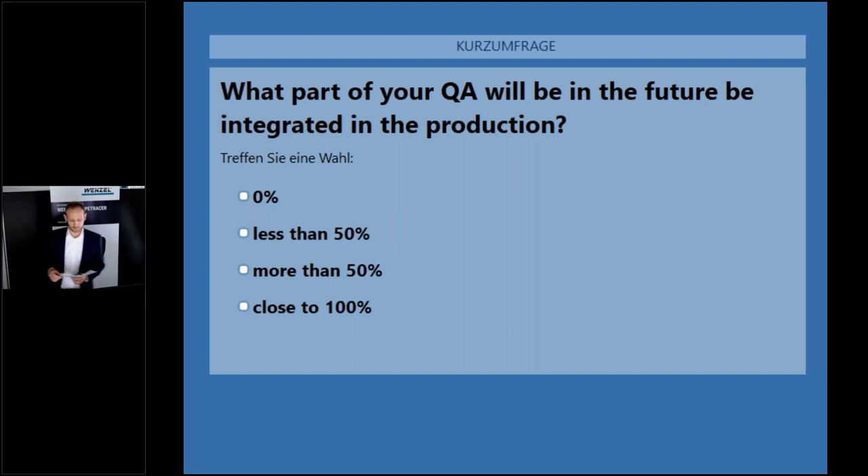The outline of my talk is very simple. First, we will quickly present the company of WENZEL, just one slide to give a brief heads up for those who don't know us. Then we will move right away into the questions we have in the shop floor environment. Okay, let's start. Thank you very much.

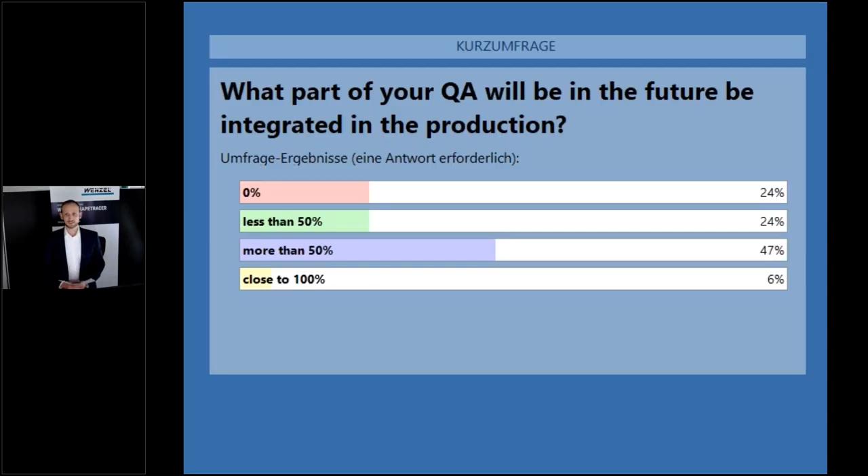Let's start with WENZEL. We've been around now for 50 years. We have a turnover of approximately 90 million euros. We have 650 employees worldwide in 17 locations, so basically everywhere in the world you can have a WENZEL guy right away for you, and a lot of sales and service partners, over 50, in 5 product lines: CT, shop floor, LH machines, and so on, with over 10,000 sold machines in the market.

Let's see about that. But first, before we start with the machine itself, I think I quickly want to raise the question of what is changing if you come from the quality rooms, measurement rooms with a very specific environment, into the production area. I think there are 3 key things that change now: first, people; second, space; and third, reliability. What do I mean by that?

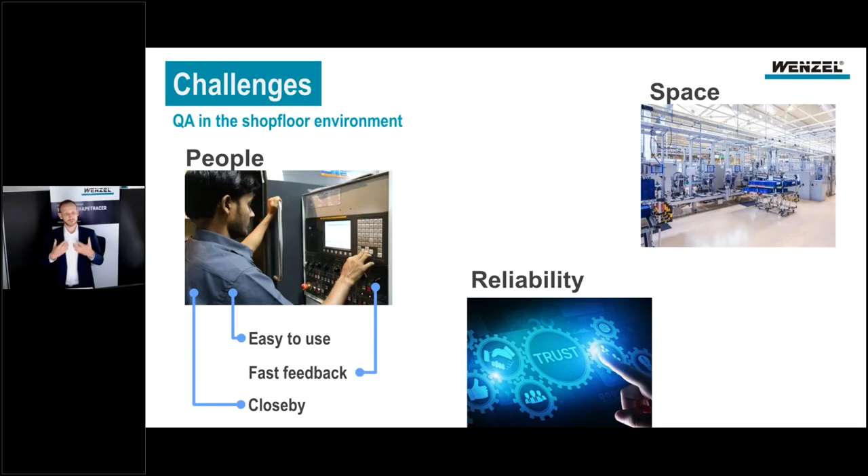It's close by, and close by means material flow. You don't have to put the material somewhere else and then get it back; you can take it out of the machine, put it on the measurement machine, and then right away get it into assembly or whatever. But on the other hand, this means small footprint. Production space is always expensive, so we need quality assurance machines or CMMs that have a small footprint in order to get them right next to the production line.

And we have to be really fast. The scale we're talking about now is we have to have the same number of parts per hour as the production machine, and that's particularly challenging. This is something I want to address here too.

And of course, reliability. You have uptime and so on. The machine has to be much tougher. We're not in such a controlled environment as in the measurement room, but in a production environment. So this has changed. There's more temperature, perhaps oil, or something. It's your production, you know it. So our machines have to get tougher.

One thing that's also very important is future ready, because you don't want to change it all the time. You want to buy a machine and then maybe in 5 years buy a new sensor. This means our machine has to be designed so that you're ready for the future. And reliability also means the service has to be really responsive. If you have a problem, the guy has to come right away and know how to fix it quickly, so the production line doesn't stop. So that's the challenges, in my opinion: people, space, and reliability.

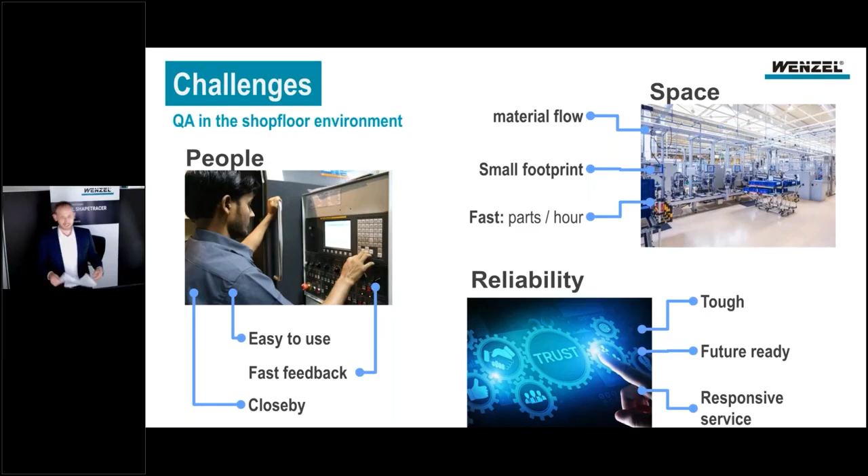Here I have a second question for you: to what extent are you planning to integrate quality assurance into your shop floor? From my experience, there are 4 options. You can have it still in the measurement room, or go to the next step where the measurement room is much closer to the production line, or have worker self-check, meaning the worker takes the part out of the machine and measures it, or even full automation with a robot, so you don't have any workers in the production line at all. So quickly answer me: to what extent are you planning to integrate quality assurance into your shop floor environment?

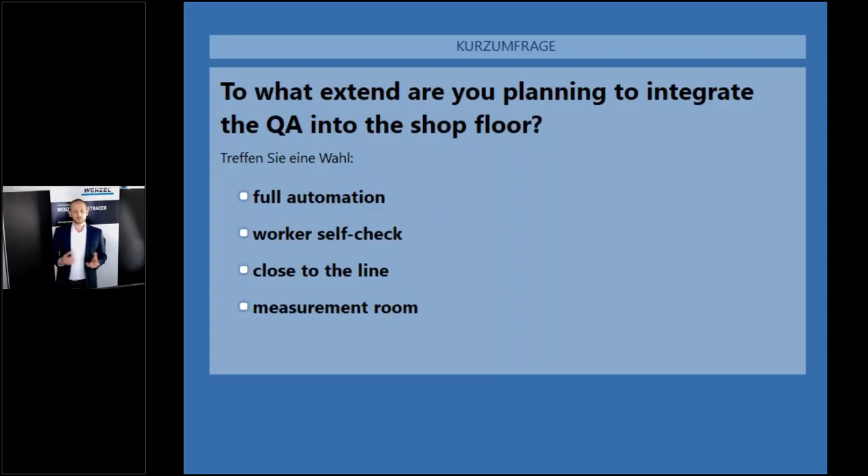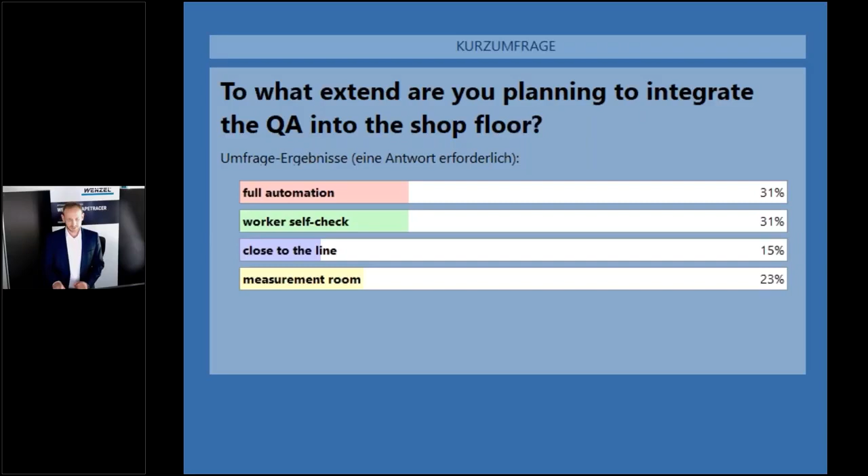To what extent? Okay, here we are again. Thank you very much for giving the answers. And now it's time to present the machines. It's not only one machine, of course. You have a lot of tasks, and what Wenzel can offer you is a portfolio. We have exactly the machine for your tasks, specifically tailored. And that's the good thing.

If you look at that portfolio, we have the SF55 with a 500 by 500 by 500 measurement volume, the SF87 at 800 by 700, the core which is much more specialized with a rotary table, our new machine, as well as the R machines for really big parts—I think the biggest one we built is something like 60 meters long. But today I want to concentrate on the SF series: the SF55, 87, and the new 1210.

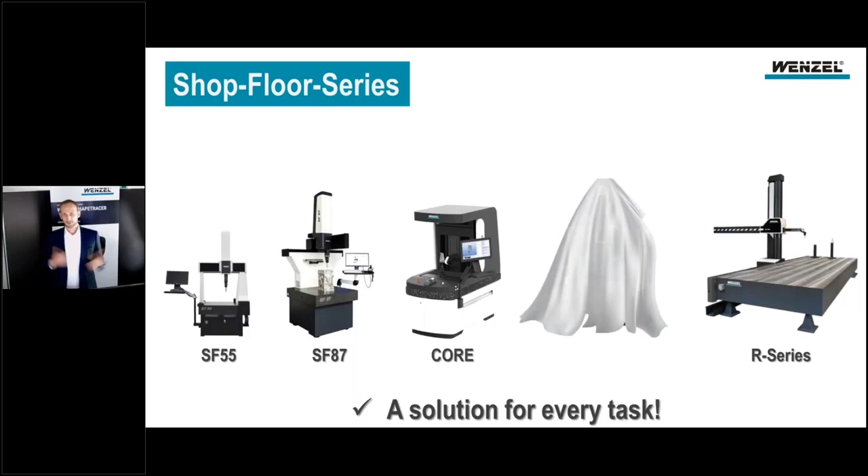So let's start with that. SF55, it's a very small, compact machine, meaning if you want a very small footprint, you should pick that one. If the part fits this machine, then you're fine. And it's really fast. Of course, the problem with these webinars is I'm just standing here in front of this background. I can't show you the machine, which is typically what I would do at a fair.

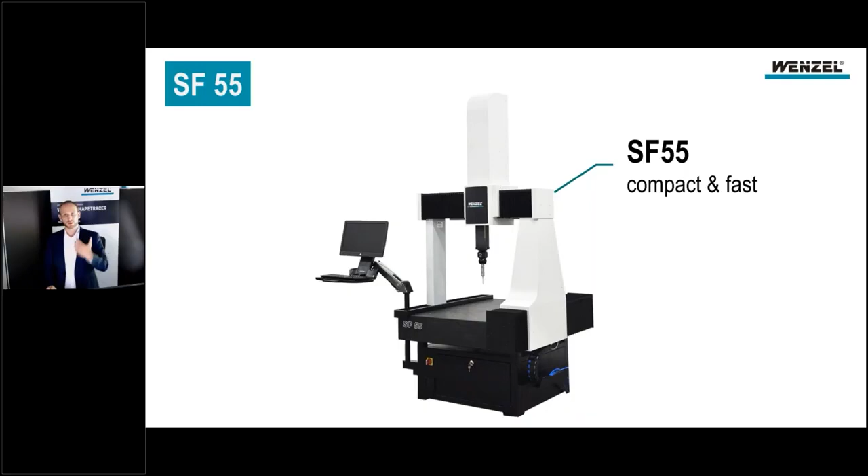This is why we made videos for all the machines. This is what I want to present to you now, the video of the SF55, so that you can actually see how it moves, how it works, and then we'll talk about it. Okay, so here's the video.

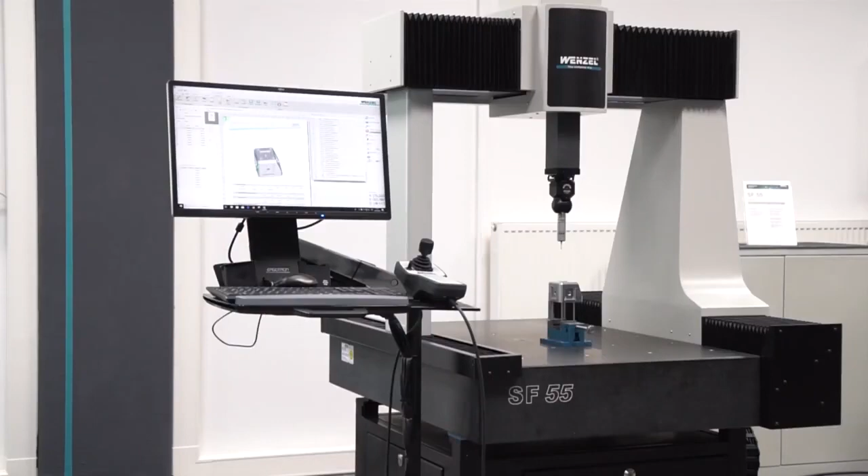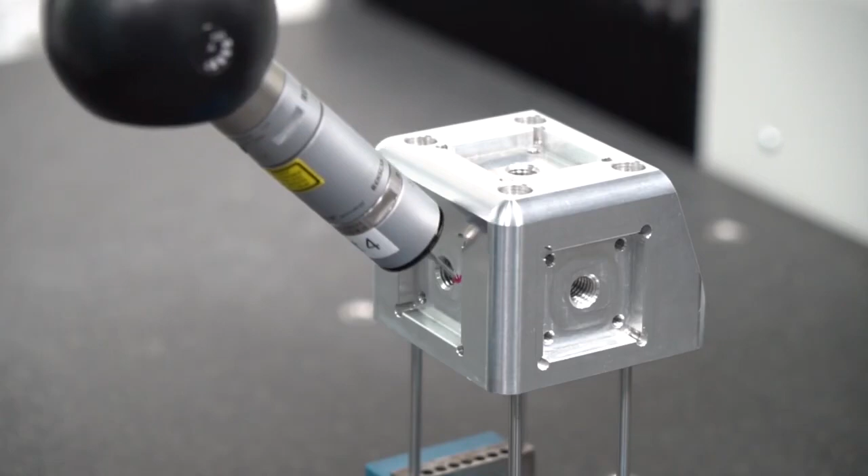Starting up. The Wenzel shop floor series can be used in the production environment as well as in classical quality assurance to measure parts both individually and in series. The intelligent and compact design is suitable for a wide range of shop floor applications, especially in the cutting and forming industry. The corrosion-free guides of the machine are made of granite, and hand-lapped with high precision. The shop floor CMM has passive vibration damping and can optionally be equipped with active vibration isolation. The high accuracy of the SF55 is temperature stable over a wide range.

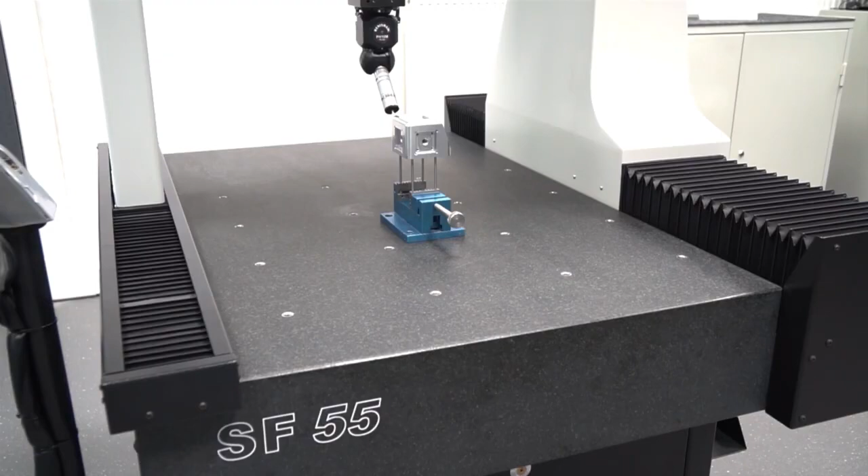All horizontal axes are covered. The footprint is only 1.6 square meters. It has a height-adjustable user panel for ergonomic use, and with the quick selection board in the software, it is very easy to operate by production workers.

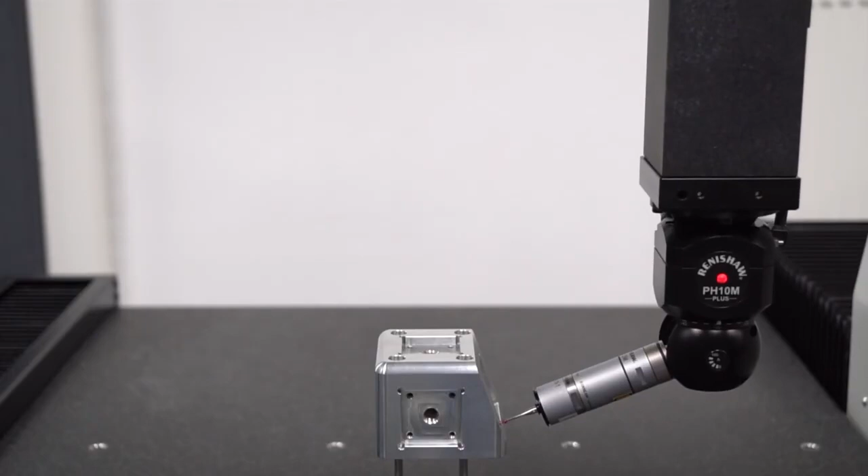With these features, the WENZEL SF55 is perfectly prepared for shop floor area conditions. The WENZEL SF55 can be equipped with both tactile and optical sensors. For use in serial measurements, the machine can run in superfast mode. After measuring one part in standard speed, the following parts can be measured in superfast mode with nearly the same repeatability and be compared with the results of the first measurement.

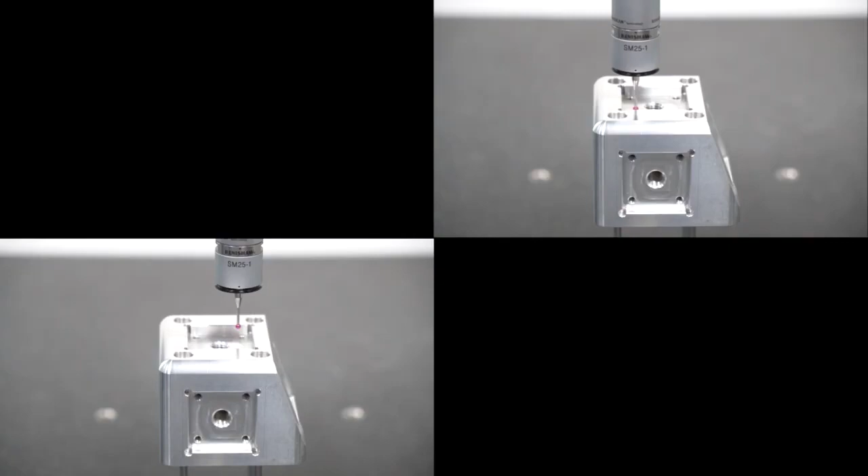WENZEL Shop Floor Solutions. Robust, fast, ready for automation.

So yeah, let's start the presentation again. That was our SF55. As you can see, it's a really compact machine. We're talking about 1.6 square meters, that's not a lot. You saw it in the video, the size is really small. So if you have a space problem and the part fits this machine, then this is your machine. Just take it, put it right next to the fabrication machine, and you're fine.

I really have to point out, it's extremely reliable, these kinds of machines. We have it for some big customers. I think one has something like 20 machines there in a really rough environment, and it's been working for like 10 years or something, with nothing really happening with the machine. So it's a very reliable, stable machine which we've been working with for years, and you can be absolutely certain that it's working.

And it's temperature stable, and as you can see, you have a lot of options. You can put tactile probes with it, like the TP20, TP200, and so on. Or if you want to be a bit faster and you're not really into the precision, then we're talking perhaps about the PH20 - you can be really fast with that. The advantage here is that the head movement replaces the machine movement. Or if you want to go really accurate, you can use the SP25.

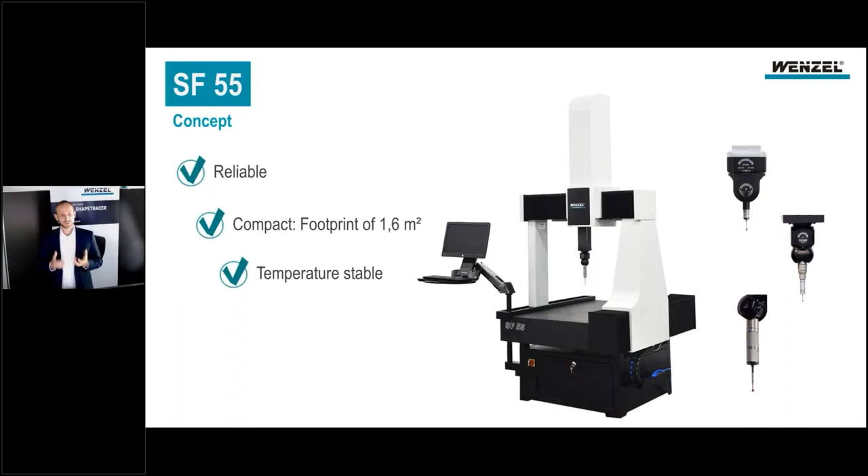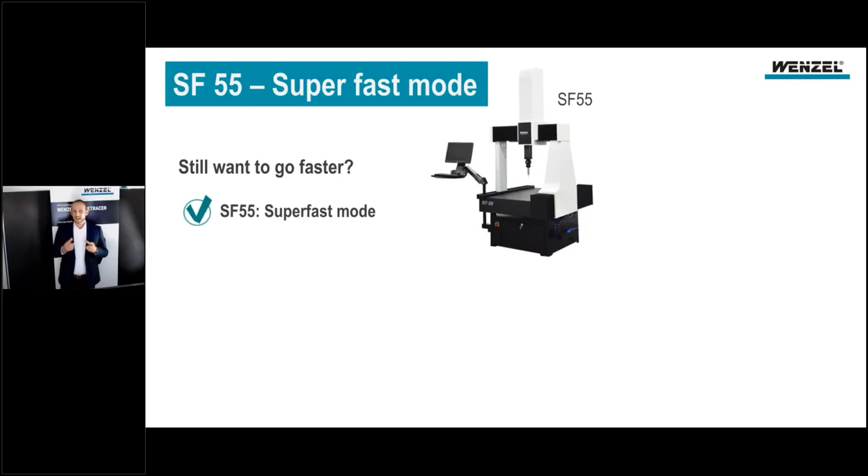There was one idea from that video I want to present in more detail - you still want to go faster? It's a fast machine, but you can still want to go faster. There was this idea of the super fast mode, which we put into the machine. It's basically the idea that you take 10 parts that come out of your machine, and measure one of those pieces very accurately, just the way you've done it all the time. And for the other 9 parts, you put the machine into the super fast mode.

The key thing here is it's still reproducible, so you get always the same results if you measure 10 times again. That means you compare these reproducible results with the accurate result you had first. And then you always take like 1 out of 10 or 1 out of 100, to what extent you want that part measured really deeply and accurate, and for the other ones, you can be fast.

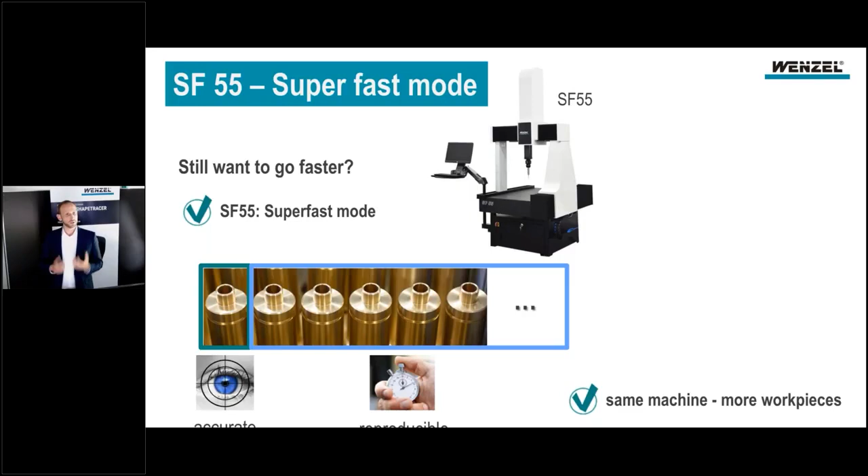That means you have the same machine, the same shop floor space we're talking about, but you get much more work pieces through this one particular machine. So I think the super fast mode is really something you should consider in your process if you buy such a kind of machine and you're in a hurry.

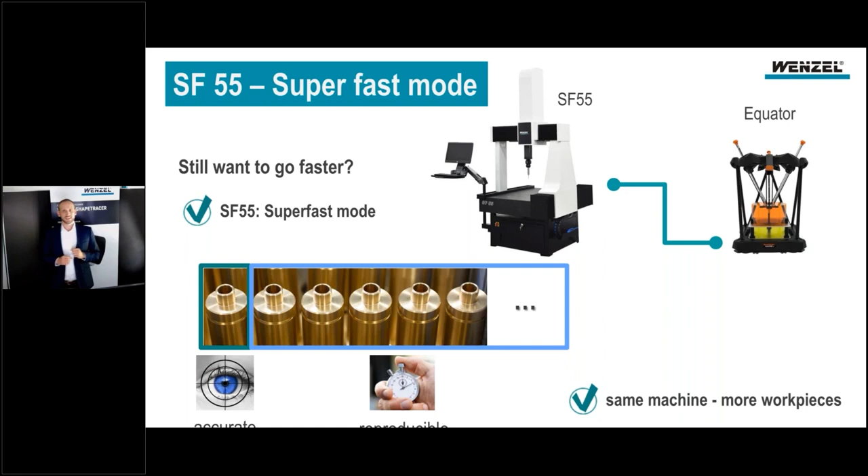And just to put one more idea into your head, this can also be done with the Equator. The Equator is also a very reproducible machine, and then you sometimes have to double check it with an accurate machine, SF55, or you have just one solution with the SF55. So if you're in a hurry and you really have to get in line here, then this might be your option.

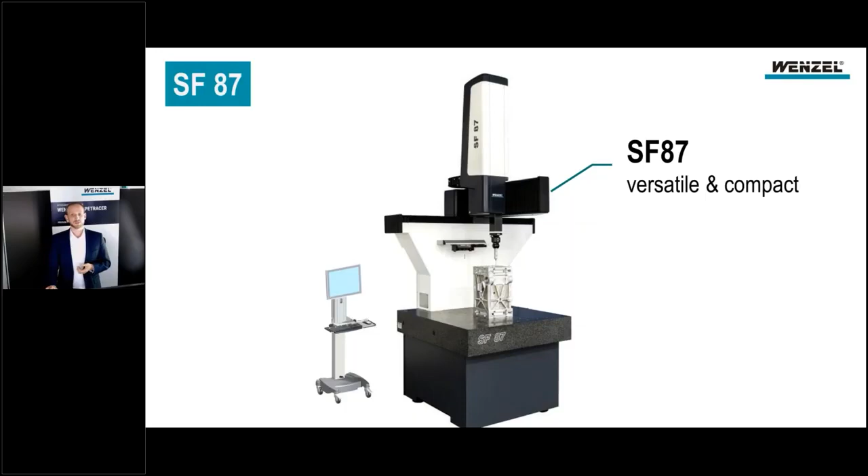Okay, let's move on to the next machine. It's the SF87 - we're getting bigger now. As you can see, we started with the smallest machine, and as we're getting bigger, the machines also become much more versatile. Here we are at the point where you have a machine which is much more versatile than the SF55, but on the other hand, it's still compact. And of course, we also prepared a video for you so you can see it in action. So here it comes.

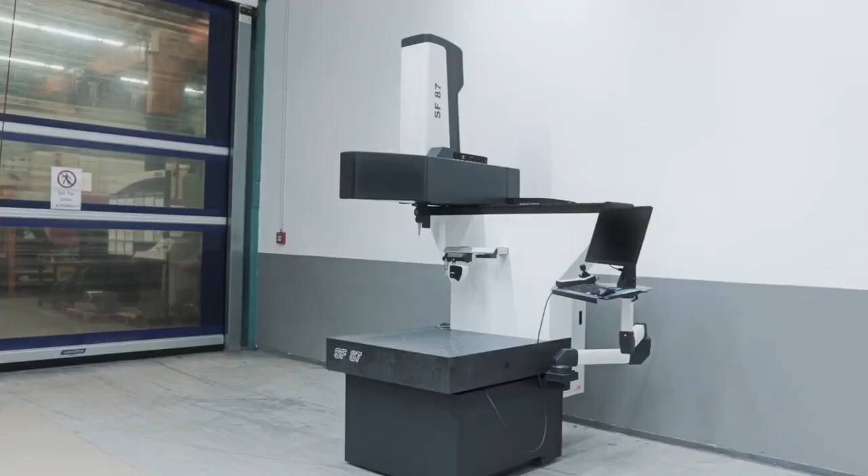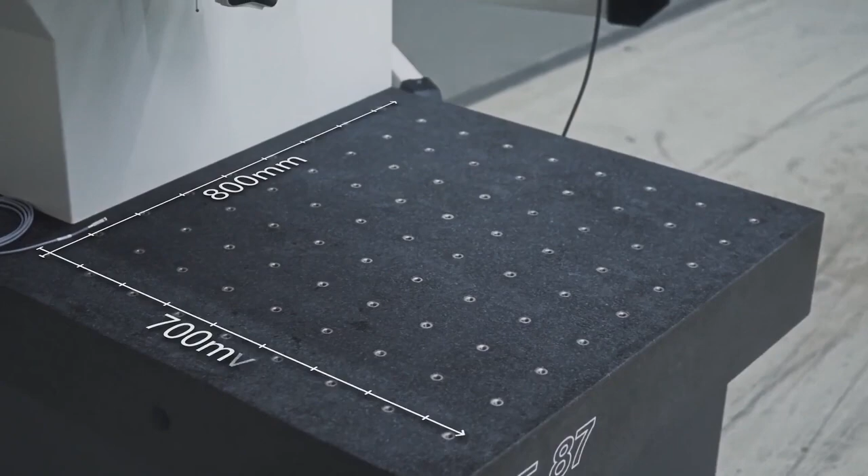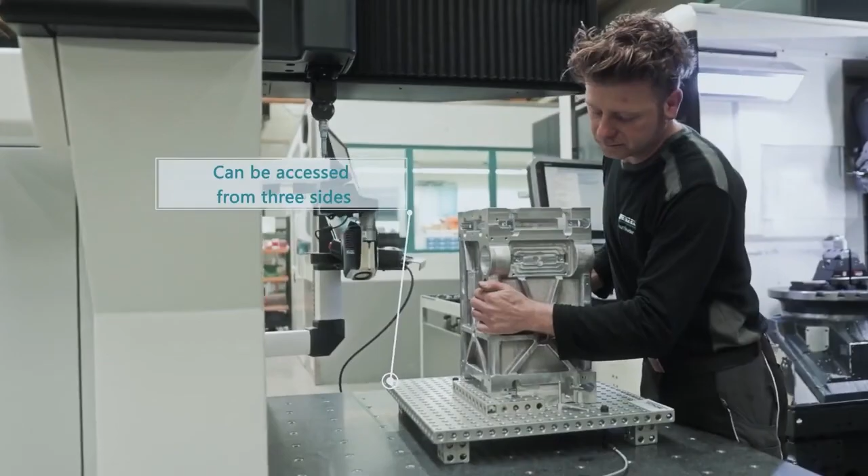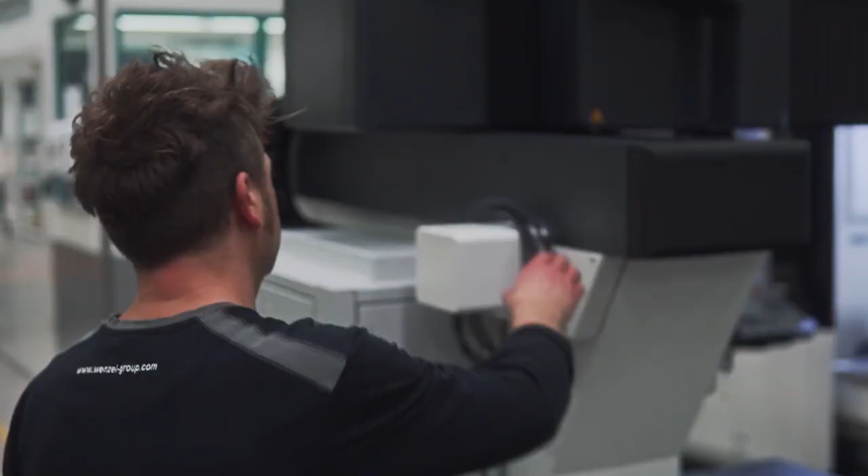This is the new WENZEL Shopfloor SF87. The coordinate measuring machine was developed for the production environment for measurement of small to medium-sized workpieces. A strategic choice of materials was made during product development. The accessibility to the measuring area from 3 sides is optimal for automated access by robots and can be adapted flexibly for more complex tasks with customer-specific requirements. The SF87 is easy to transport and only a standard electrical socket and no compressed air is required to connect the machine. It is therefore always available for flexible use in the production environment.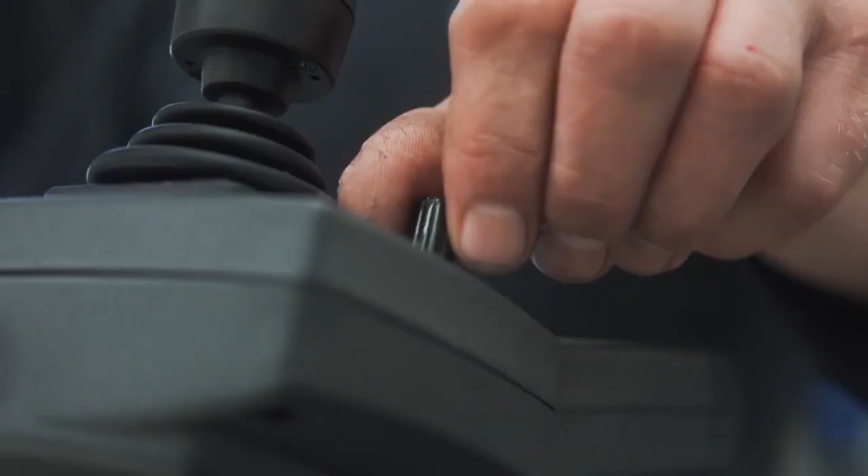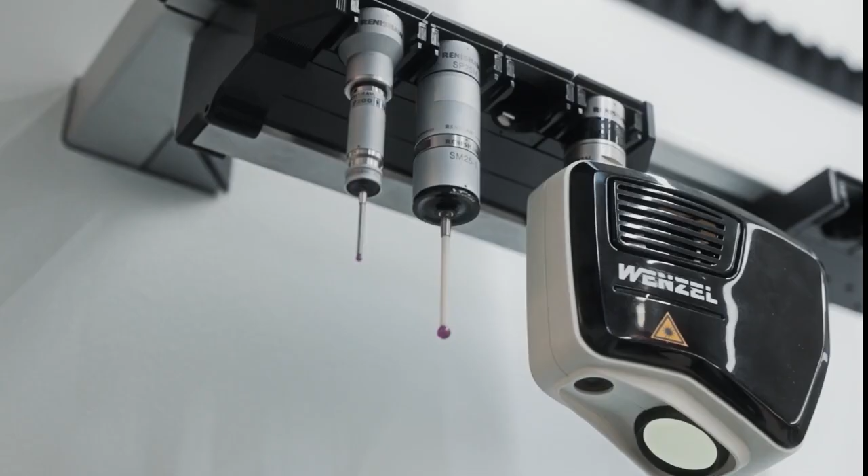The intelligent machine concept has been designed for optimum ergonomics and user-friendliness. With the modular combination options of powerful probe heads and optical sensors, the machine can be adapted to its respective tasks, which leads to considerable increases in efficiency in the measuring and testing area.

So that was our SF87. And what's unique about this kind of machine is look at the access and the volume of this machine.

It's an intermediate size, and you have the cantilever design, which basically means you can access it very easily from 3 sides. You can put a robot there, or even if you're just a person, and we put it at the right tabletop height and so on. So it's very good to access and to work with.

We still have an extremely small footprint of just 2.3 square meters. All mechanical guideways, really tough. It's all made from steel so that you have one material all the way up, and it's ready for automation. And if you look at it, you can see that the controller is also integrated into the machine.

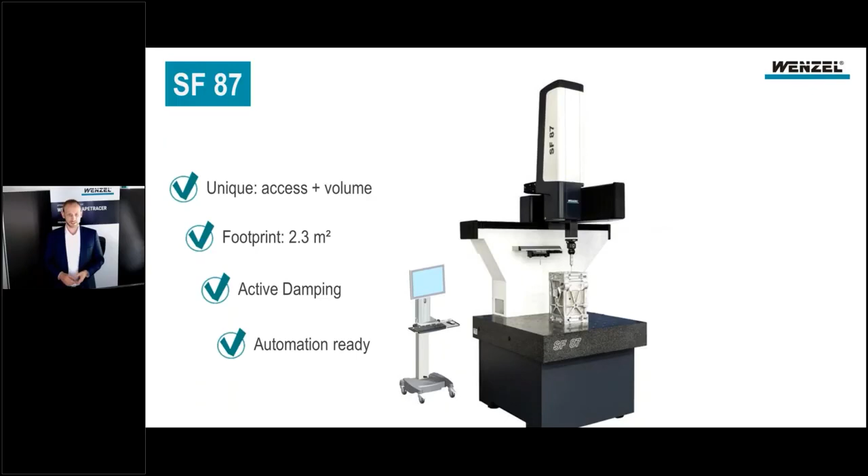You actually can't see it right now because it's behind the machine in a backpack. So all these things together make it, in my opinion, a very unique machine where you have this combination of tough, big volume - it's 3 times the volume of the SF55 - compared with a small footprint. And that's the bonus, it's much more versatile.

You can still put the TP20, TP200 or the PH20 on the machine, but now as the volume grows bigger, you can also put optical probes on the machine, and you have always the standoff distance, so you have to move around the part a bit more. And here you can already use that very well on the machine.

And if you want to go really fast, then you put the Revo there. This combination of the bigger measurement volume and the Revo can offer you a very flexible machine, which is extremely fast for the application if you want that. So it's much more flexible and still compact.

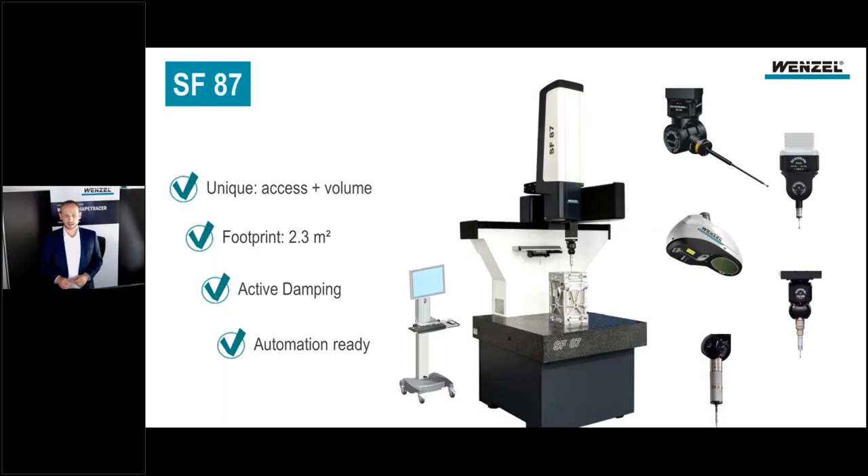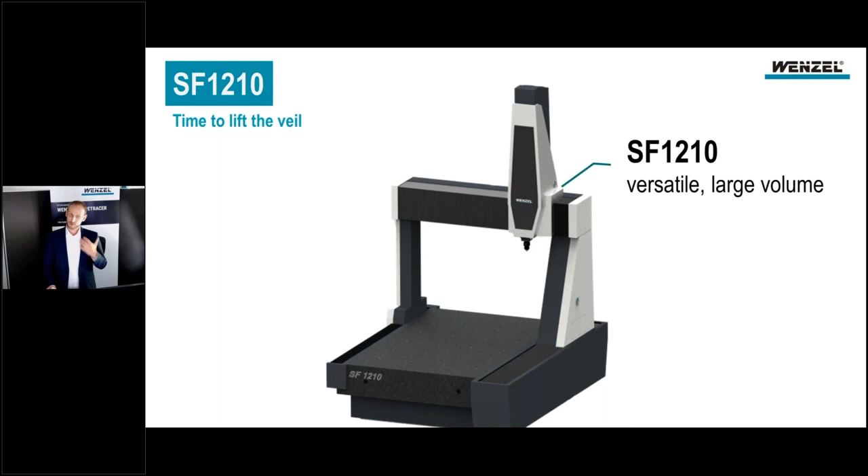And now let's go to the new one. So we proudly present the SF1210. Here we have a machine which is even more versatile, and we get to a volume that is way bigger than that of the SF87 or 55. And of course, we want to show you how it's looking and how it's moving.

And here comes the video.

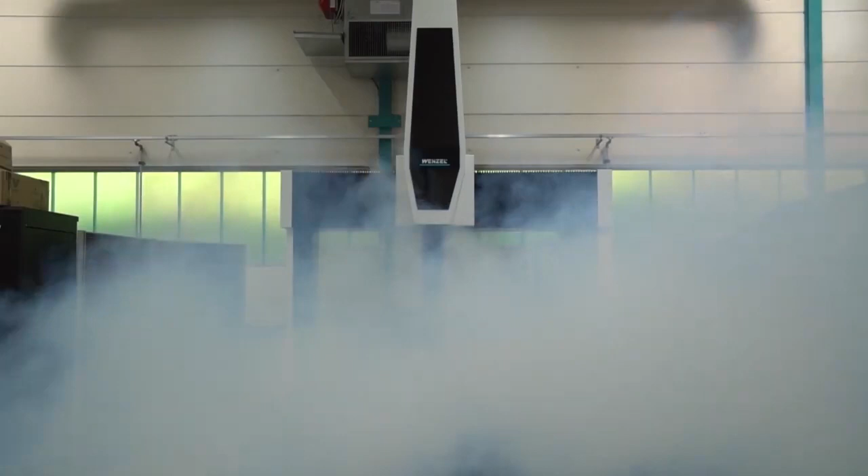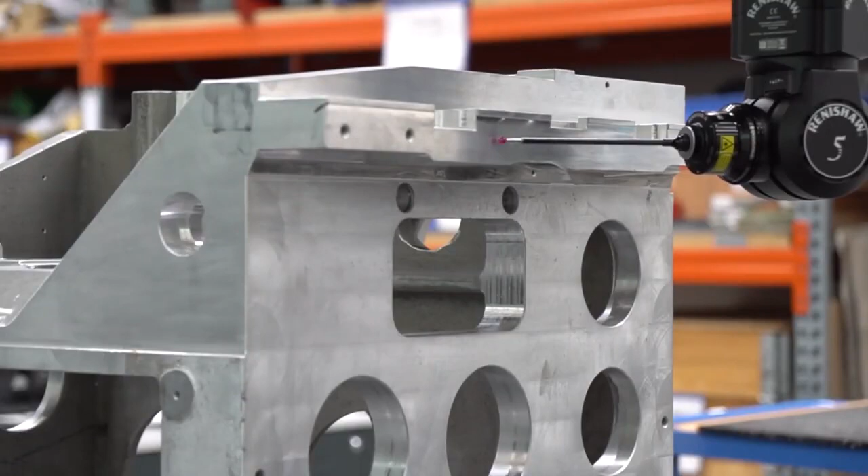The WENZEL Shop Floor series can be used in the production environment as well as for classical quality assurance to measure parts of various sizes both individually and in series. The new SF1210 is WENZEL's answer to the trend of bringing metrology closer to production lines. A measuring volume of 1200 by 1500 by 1000 millimeters is unique on the market for this machine type and enables the measurement of even large parts and assemblies. The Y-axis can be individually adapted. Covered guiding systems the same height as the base plate enable machine loading from 4 sides, by hand as well as by a robot or an automated loading system. The SF1210 is multi-sensor compatible with a wide range of probing equipment. This flexibility increases efficiency in measuring and testing processes. The SF1210 with extended temperature range, small footprint, and double drive in the Y-axis is highly suitable in the manufacturing of castings, chassis parts, subframes, engines, and a lot more. WENZEL Shop Floor Solutions. Robust, fast, ready for automation.

So that was the video of our SF1210. As you saw it moving, you can put really big parts on this kind of machine. And so you can also load it from all sides. So let's look at the advantages.

First of all, what we really took care of, because sometimes it's the small details that make life much simpler, is that you have excellent four-sided access. If you look at the bellows on the right and left guide of this machine, you can see that it's on one level with the base plate. That means loading of this machine is extremely simple, and you don't have to build your fabrication around this machine, but you can just put it any way you like into your shop floor, and it's always simple to load this kind of machine.

So one of the simple and clever things we put into this machine. On the other hand, it's robust. We're talking about an all mechanical guideway here, which is the difference also to the LH series. We have mechanical guideways here in all axes, as you saw. And we made rod drives into the machines.

These are very well-known drive systems which are extremely reliable. They hardly ever break. And this together with a dual drive system in the Y-axis makes this machine extremely robust for the shop floor application. Then you have the large volume, of course.

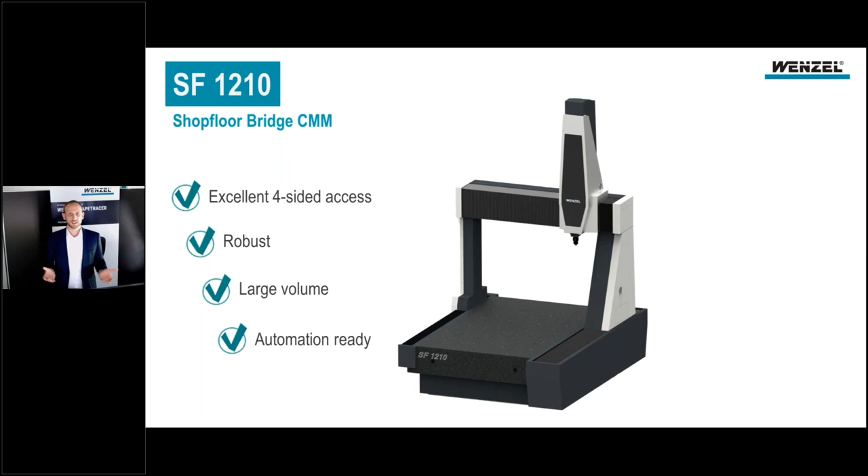So if we look at what kind of probes can work on this machine, basically everything. You can even take the larger optical probes on this machine. And as you saw with the Revo, it can be really fast. There was this helical scan where the machine just drew away and you had this very quick, rapid head movement. This is something that would take much longer if you took the SP25 or even the TP200. So you really should look into, if you want speed, the Revo option here.

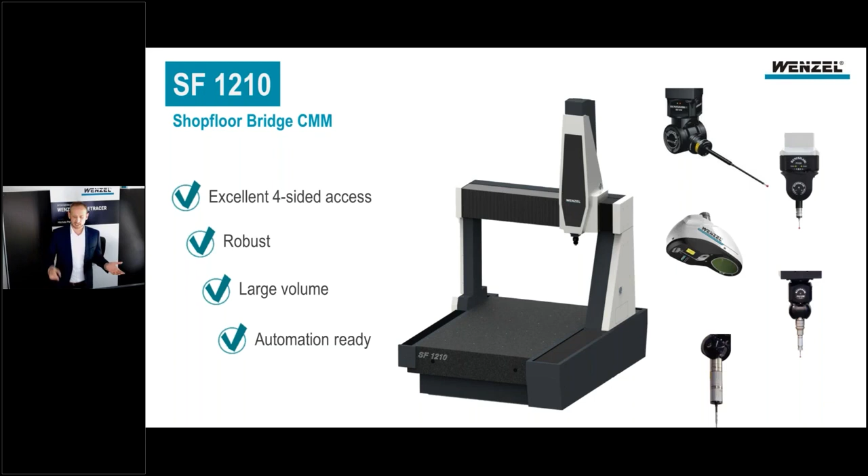So these are the three machines I wanted to present to you, and now we're coming to the solution finder. So what's the right one for you? Well, this is basically a two-step process, and it's very simple.

The first one is size. So of course, your part size is most important. The part has to fit on the machine. But there's one thought I would like to place into your head here: why not put multiple parts on the machine?

We had several customers who actually put one part on the left side of the machine, and while the machine was measuring this part, they had time to load the other side. So they had zero stopping time of the machine, zero loading time. You can very efficiently use this machine.

So if that's possible for you, you can even put a pallet with 20 parts on the machine, and then you have left-sided and right-sided loading. So you should always consider, perhaps it might be a good idea to measure several parts on the machine and take it one size bigger.

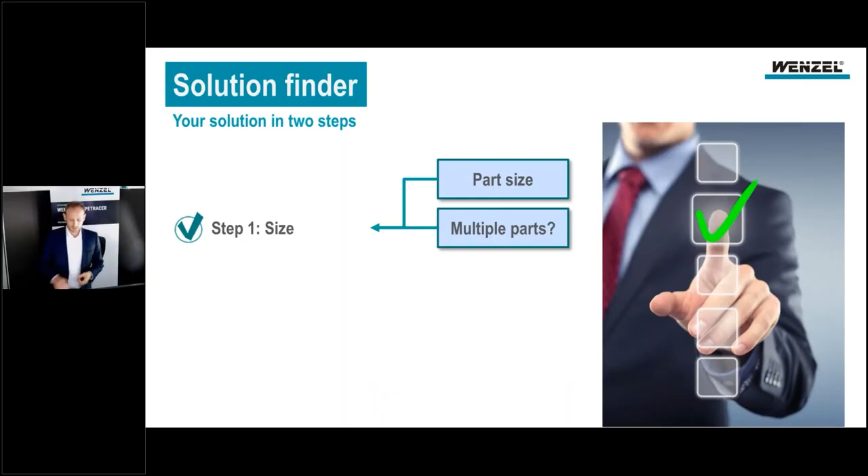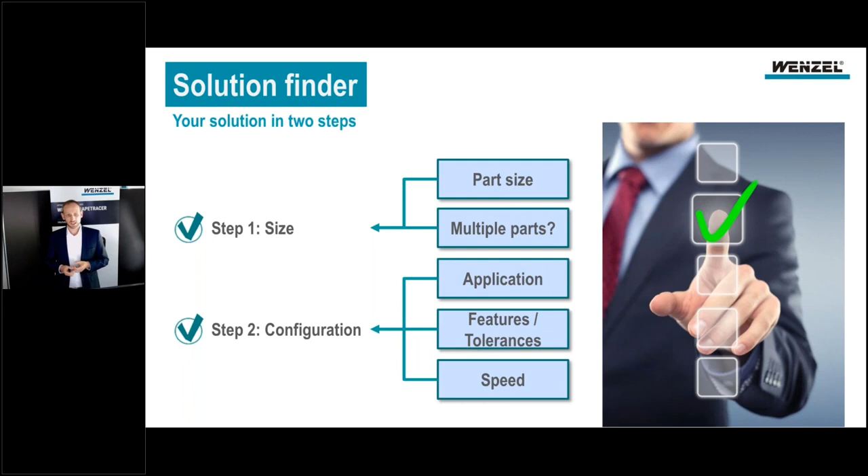And the second step is the configuration. What's the most important thing here? Of course we had part, now we have application. What's your features? Which ones are your tolerances? What about the speed? This has a very big impact on the configuration you want to put into your machine. Okay, so these two steps, two slides for those two steps.

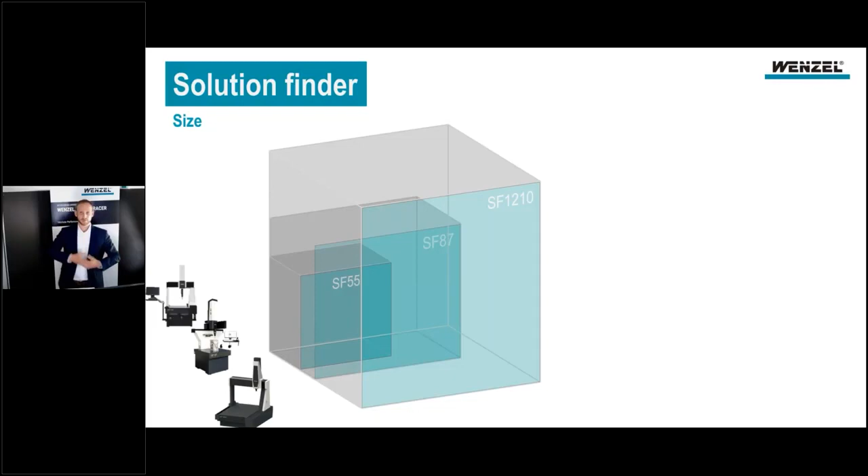One slide in the solution finder is the size, and I gave you the numbers. The SF55 is 500 by 500 by 500 millimeters. And if you go to the 87, you can see in these cubes very clearly it's 3 times the volume. 800 by 700 by 700. And if you go to the 1210, 1200 by 1000 by 1500, then you have, I calculated this morning, 4.6 times the volume. So it's always an increase of 3 and then almost 5. That's quite a lot.

But what's more important for you is, for your footprint, you need the optimal size. And this is what we want to offer you. We have 3 machines, so if you look at the footprint and at your workpiece, if you have a larger workpiece, you take a bigger machine, but it doesn't have to be really too big because we have it in every step for you.

Or you put more parts on a larger machine, or you take the very small compact machine. If you have a small compact part and you want to measure that and you don't have much space, then you take the small machine. That's absolutely clear. For us, what's important is we have the optimal size for you. And all the machines are very versatile with the probes you can equip to those machines.

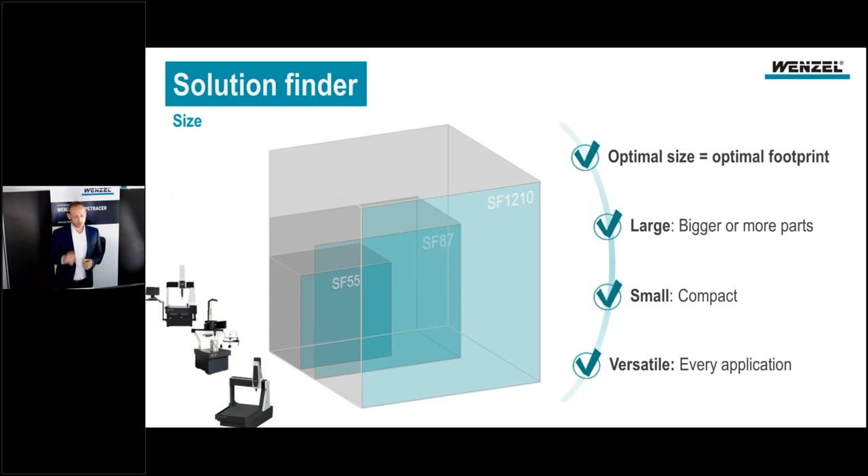And this is, I think, something we should also look into in step 2. So as solution finder, of course, what's always important is, if we look at the parts we're having here, accuracy and speed.

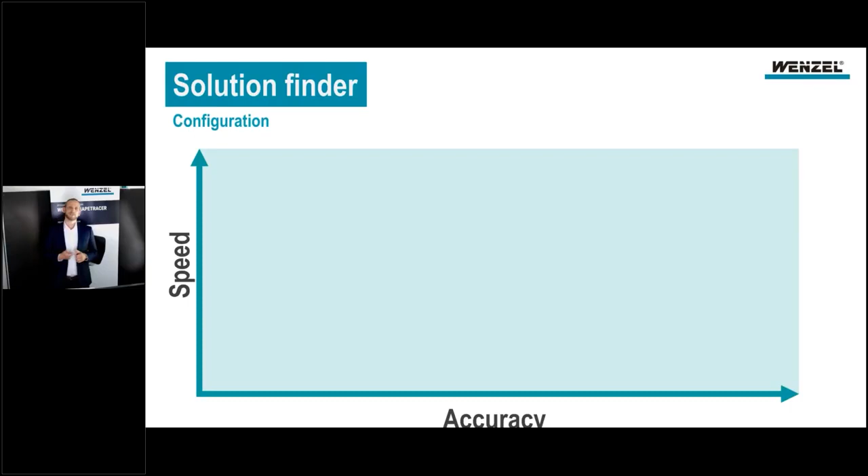And if we put now all those probes we had into this diagram, the speediest one is the optics. If you have a mold or something where you have to measure a whole area, then optics is your choice. It's really fast, and you have a point density that's almost unreachable by any tactile means of measurement. So that might be your friend.

Or if you say, okay, I still want to be speedy, accuracy is not my thing, it's fully sufficient, then I take the PH20. Here you have the head movement and so on.

Or if you want to go, you say, okay, speed is not my problem, but I want to be more accurate, then look at the touch trigger probes, TP200, TP20, or the scanning probes, SP25, which are way more accurate. And if you say, hey, I want to have it all, fast and accurate, then you look at the Revo.

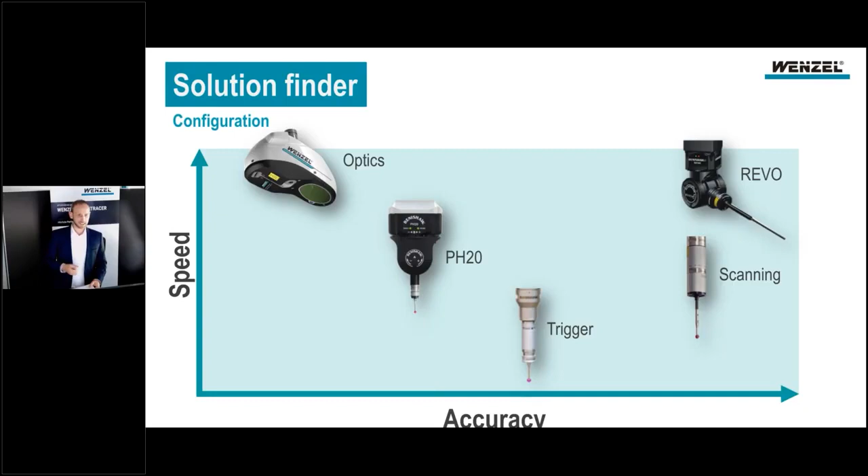As you can see, for every size of workpiece and every application, we have the machine, and it's so flexible that you can put exactly the kind of head that fits your application onto this machine. So solution finding is actually quite simple.

With that thought, let's look at something different. Because we don't only sell our machines, but we also have to produce them, and so we have experience, and there I have a question for you. In our opinion, it's also important to have plannable costs sometimes. So here's my question: how important are plannable service costs for you? Is that very important? Is that relevant?

If you buy a machine, how important are plannable service costs for you? Very important, is it relevant, or do you say, okay, Wenzel, they've been around for 50 years, they know what they're doing, so I guess that's okay. So how important are plannable service costs for you?

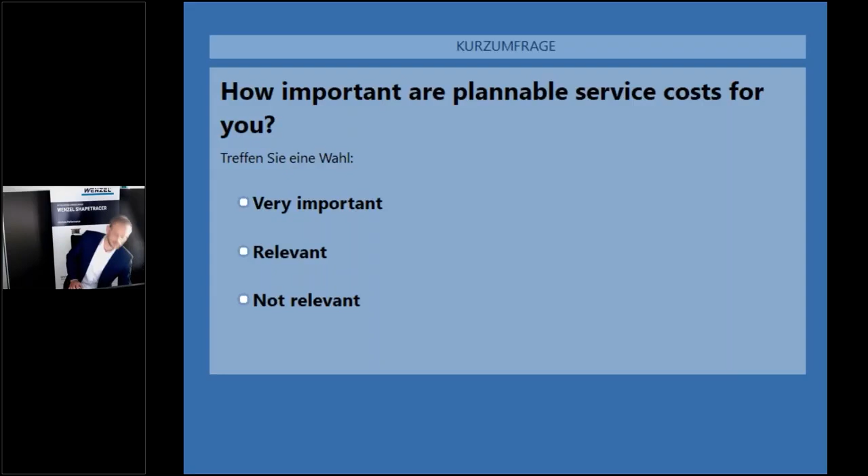Because as I was saying, we're also producing our measurement machines, and this is why we also have some experience as to how producers are thinking. When I talked to our production guy, he told me, oh yeah, we have these contracts and so on, and we know exactly what our machines are costing. And if we are moving our machines now from the quality assurance measurement rooms into the production, this might be interesting for you. That's why we placed the question here: for your buy decision, how important are plannable costs?

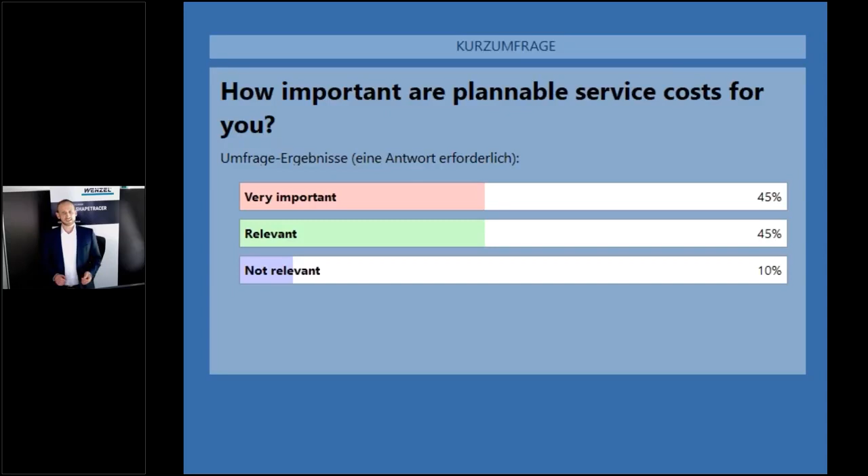Okay, I see. Thank you for voting here. And for all those who said, oh, that's very important for me, I think I have a solution for you, and that's the powerful service of Wenzel.

So what's the idea behind that? It's exactly that: you want to have plannable costs, you want to have uptime of 95% or even beyond that. And for that you need a very, very reliable service, and you have to know what kind of costs to expect when you buy this kind of machine. This is why our service guys came up with this powerful service plan. Here you have guarantees, you have a fast and guaranteed response.

And I like this very much, because for me it's not only a machine you buy, but you're buying a whole package, right? You're buying the machine, you're buying the service if you buy from Wenzel, and you're also buying the software for that. And if we look at all this combined, I think this is one of the pieces that have to fit into this jigsaw here.

Okay, so let's wrap things up. I set out the task in the very beginning: this is people, space, and reliability. And I'm sure I convinced you that we actually have the solution for you there.

Space, we have the small footprint. For all the machines, we made it extremely small. We always had the controller units in the machine and so on, so you have the smallest possible footprint for that measurement volume.